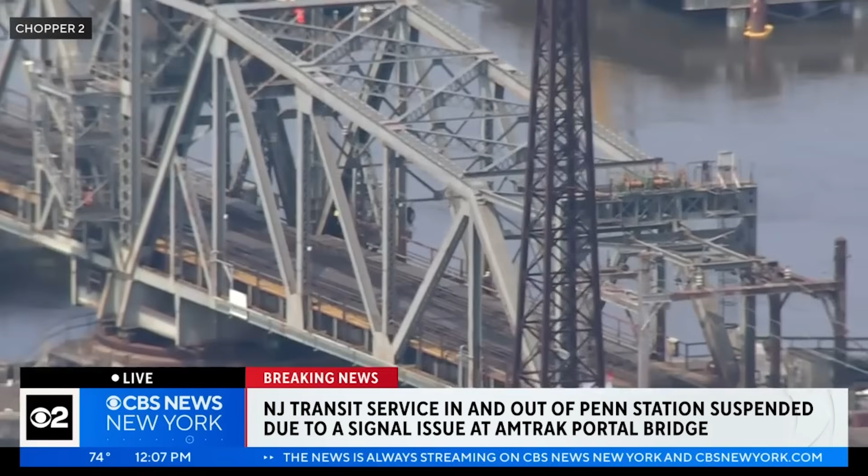The reason? Yes, again, Amtrak's Portal Bridge. Let's face it, this isn't the first time for all the Northeast Corridor riders. Built in 1910, the Portal Bridge was an engineering feat of its time. But today, it's one of the most notorious bottlenecks in the region's rail system. Its low-clearance swing design means it must frequently open for river traffic. And when it does, train schedules are at the mercy of century-old mechanics and human improvisation.

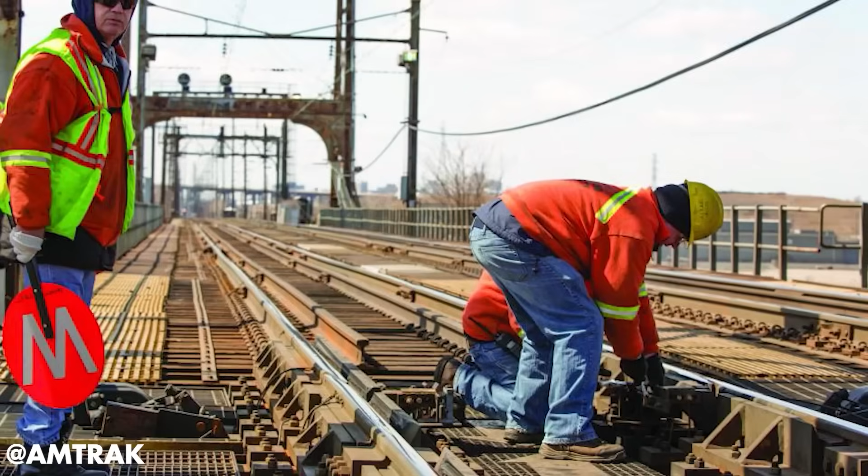That's exactly why the new Portal North Bridge is seen as a monumental leap forward, and it is now in the final stages of completion. Backed by federal and state funding, this $2.2 billion new Portal North Bridge is a landmark investment in U.S. rail infrastructure. But will it fix one of the Northeast Corridor's worst bottlenecks? And how will it reshape the future of train travel? Let's break it down.

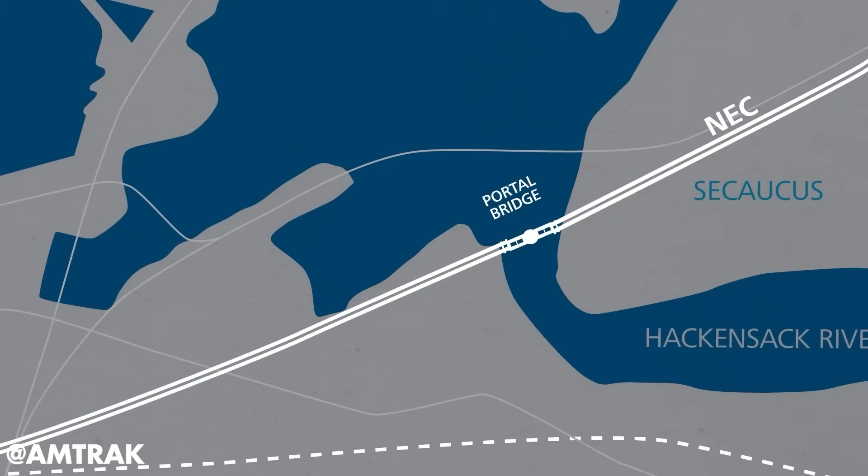The Portal North Bridge project is a critical infrastructure investment to eliminate one of the NEC's most notorious bottlenecks, the 115-year-old Portal Bridge. The existing Portal Bridge, constructed in 1910 by the Pennsylvania Railroad, has long been a point of failure for Amtrak and NJ Transit operations. Designed as a movable swing bridge, it must open for maritime traffic, a process that frequently leads to mechanical failures and service disruptions. Before the pandemic, this bridge carried over 450 daily Amtrak and NJ Transit trains. It served nearly 200,000 passengers per day.

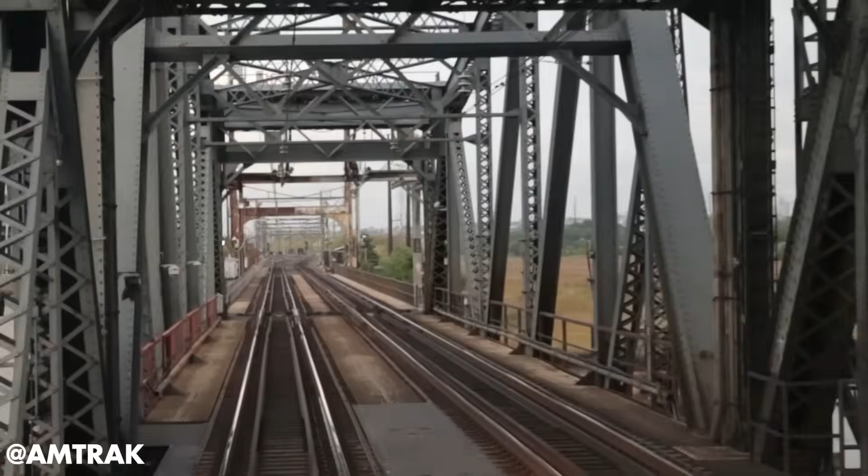Its outdated infrastructure poses a major constraint on one of the nation's most critical transportation corridors, which links Washington, D.C., Philadelphia, New York City, and Boston. To resolve these long-standing issues, the Portal North Bridge is being constructed as a high-level, fixed-span structure rising over 50 feet above the river, eliminating the need for openings. The new bridge spans nearly 2.5 miles, including approach tracks, and features a network-tied arch design, an uncommon but efficient engineering approach in U.S. rail infrastructure. This modern design will allow for higher operating speeds, improved reliability, and increased train capacity, addressing a critical NEC choke point.

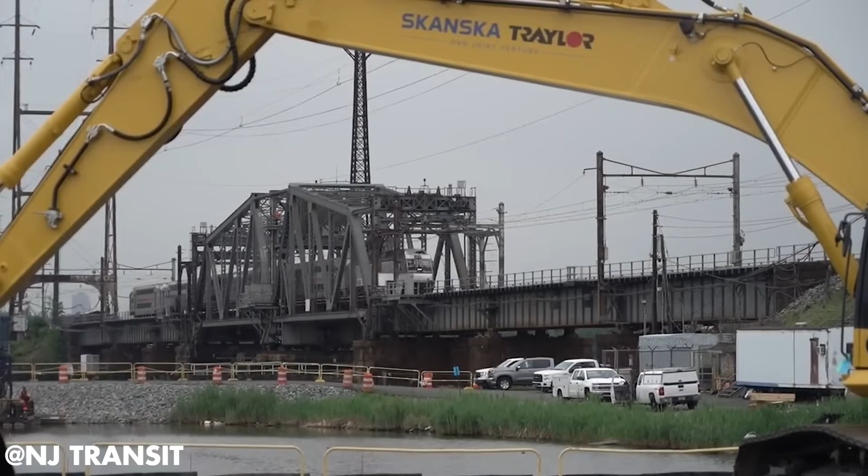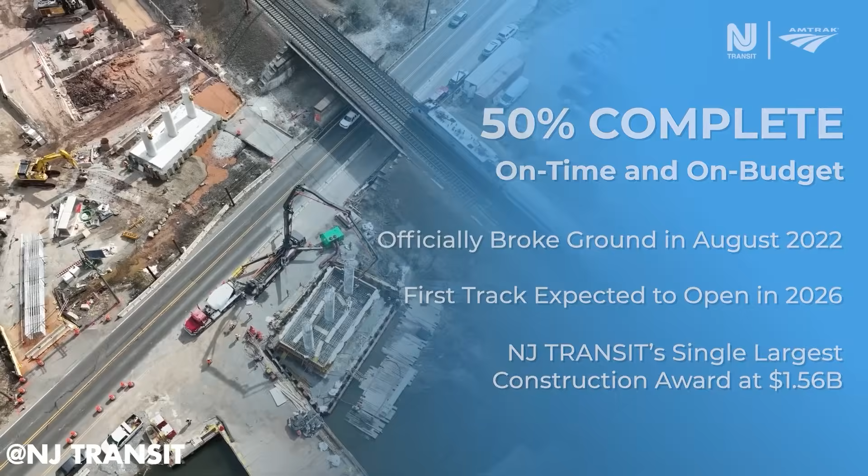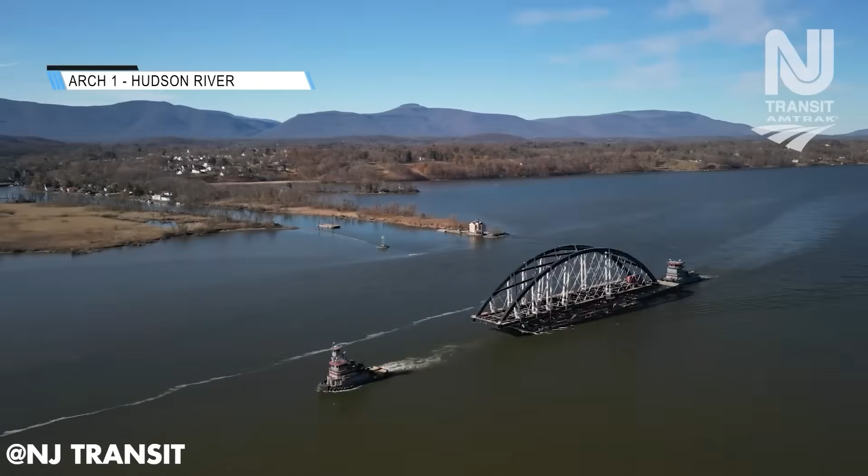The Portal North Bridge project has made significant strides since construction commenced on August 1, 2022, following final approval and the notice to proceed in April 2022. By May 2024, Amtrak and NJ Transit proudly marked the 50% completion milestone. As of fall 2024, the project is at 70% completion, with major structural components now in place. One of the standout achievements was the installation of the first of 3 structural steel arches in November 2024, a highly intricate engineering feat that involved careful barge transport and precision placement. The final arch was successfully installed in February 2025, solidifying the core structure of the bridge.

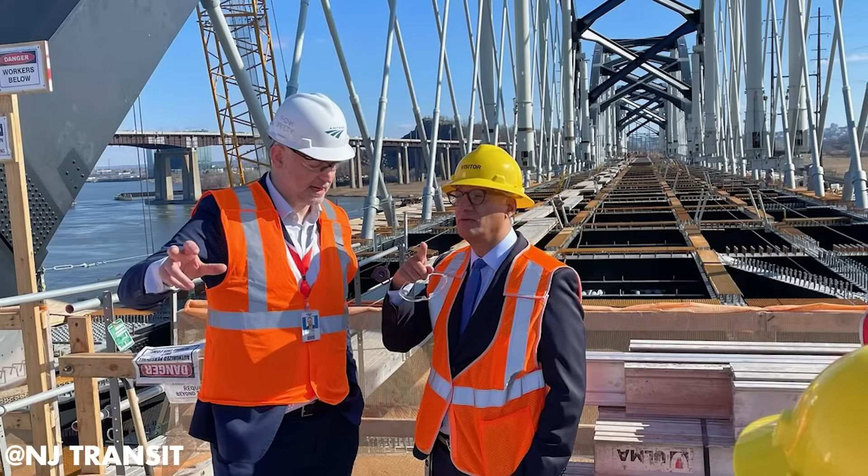As of early 2025, the project is 80% complete, with the first track expected to open in March 2026, enabling limited operations while additional work continues. The second track is set for completion in February 2027, with full integration into the NEC anticipated by late 2027. Once operational, the existing Portal Bridge will be dismantled in July 2028, completing the transition to the new structure. Notably, Amtrak has indicated that the project could be completed on time and within budget, emphasizing efficient project management and strong coordination between federal and state agencies.

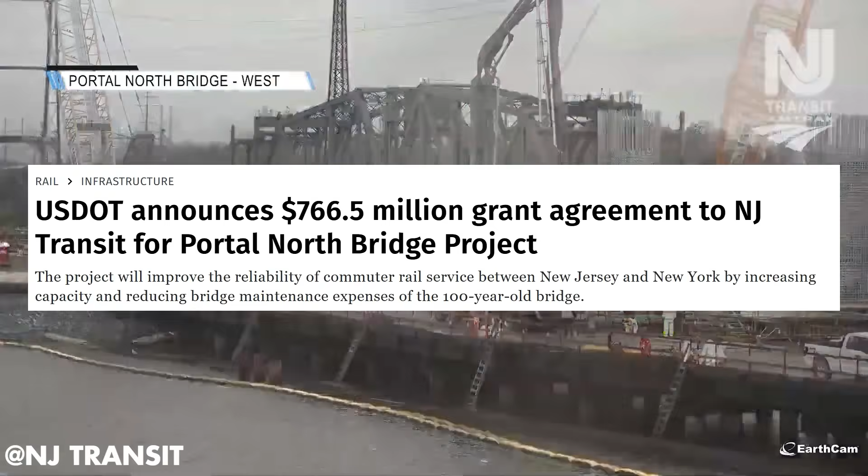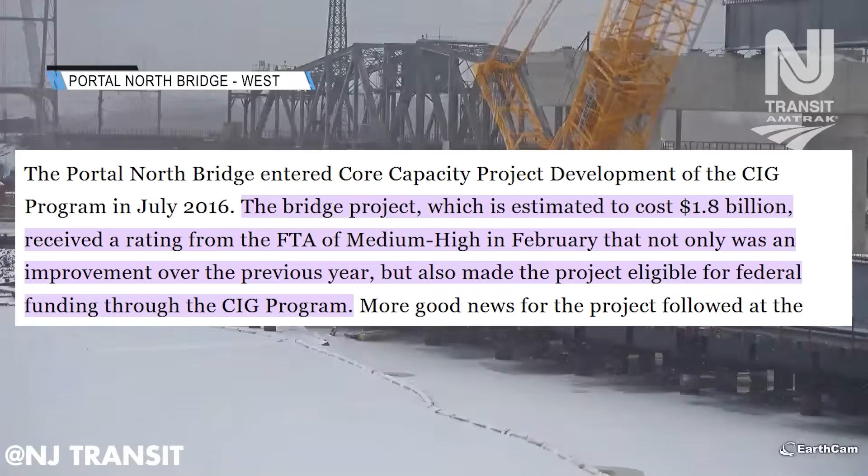The $2.2 billion Portal North Bridge project is a model of collaborative funding, drawing support from federal, state, and regional sources. Securing financial backing was a multi-year effort, reflecting the project's scale and complexity. In January 2021, New Jersey Transit finalized a full funding grant agreement with the Federal Transit Administration, FTA, securing $766.5 million through the Capital Investment Grant Program. This followed a medium-high rating from the FTA in 2020, which positioned the project for significant federal investment.

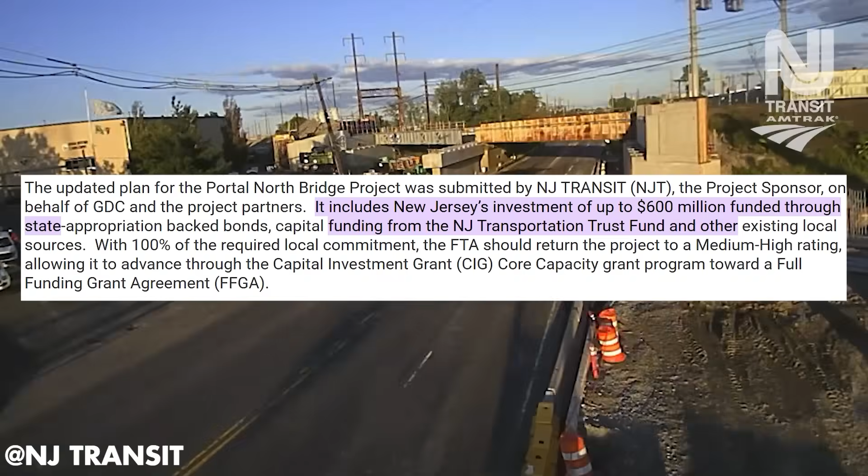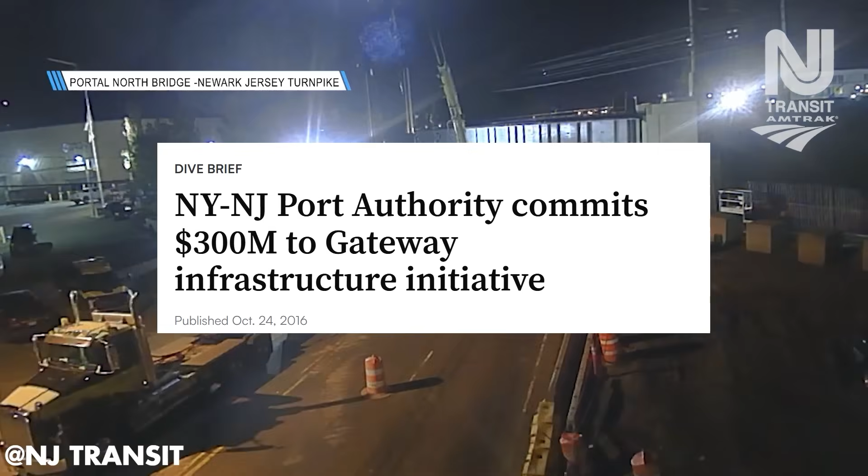New Jersey has committed $811 million, including $600 million from state-backed bonds and additional funding from the New Jersey Transportation Trust Fund. Amtrak has allocated nearly $262 million, while the Federal Highway Administration contributed $57 million. Earlier funding sources include a $55 million Federal Railroad Administration grant in May 2020 and a $16 million grant in 2015 for preparatory work. The Port Authority of New York and New Jersey also pledged $300 million in earlier phases, reinforcing regional commitment to the project.

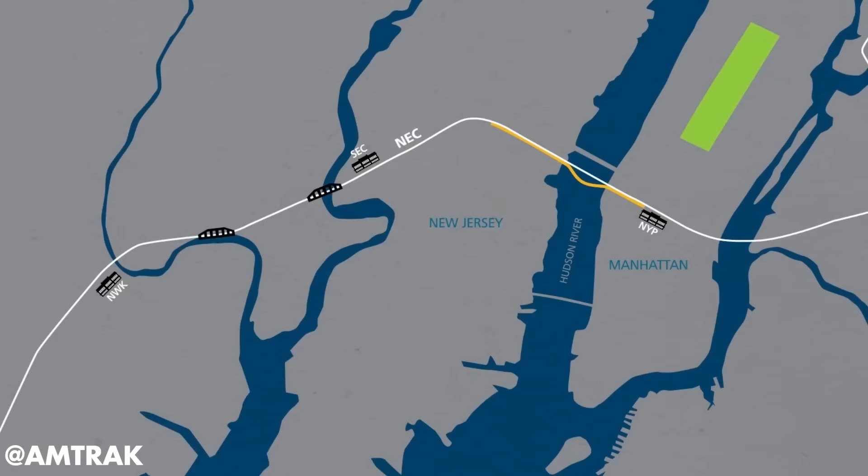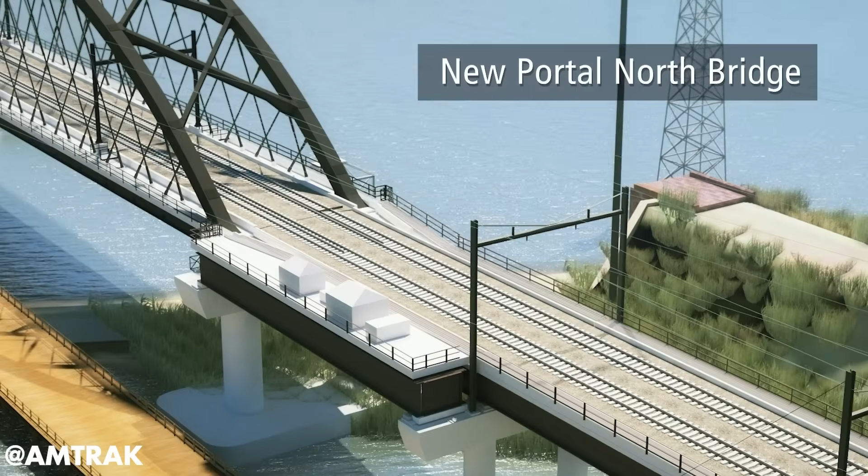While Portal North remains a two-track structure, its design accommodates a future Portal South bridge, which could double its capacity to 4 tracks. This expansion aligns with the Gateway program's long-term vision, enabling NJ Transit and Amtrak to double train service between Newark and New York. Once additional infrastructure improvements, including the Hudson Tunnel project, are completed, the increased capacity will benefit commuters, intercity travelers, and freight operators, strengthening the Northeast Corridor, a corridor responsible for 20% of U.S. GDP. Construction has already generated approximately 15,000 jobs, injecting billions into the regional economy. Once operational, the bridge is expected to boost property values and attract businesses.

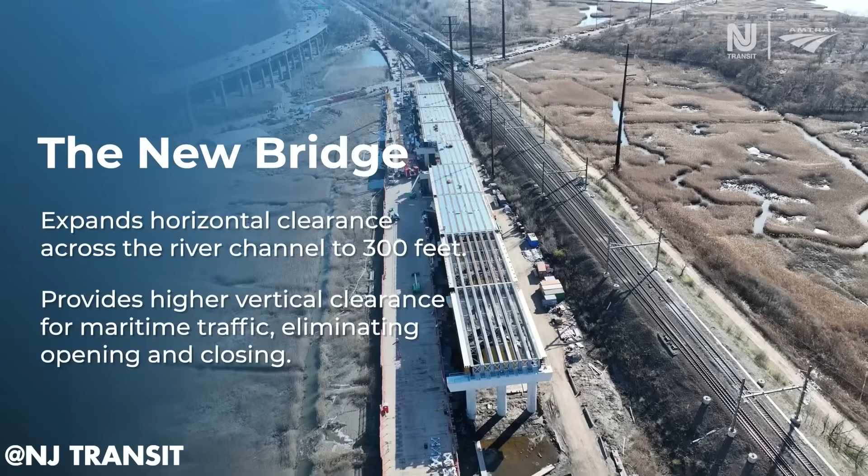Environmental benefits include lower emissions and reduced train idling, contributing to broader sustainability goals. So what were some challenges the project faced?

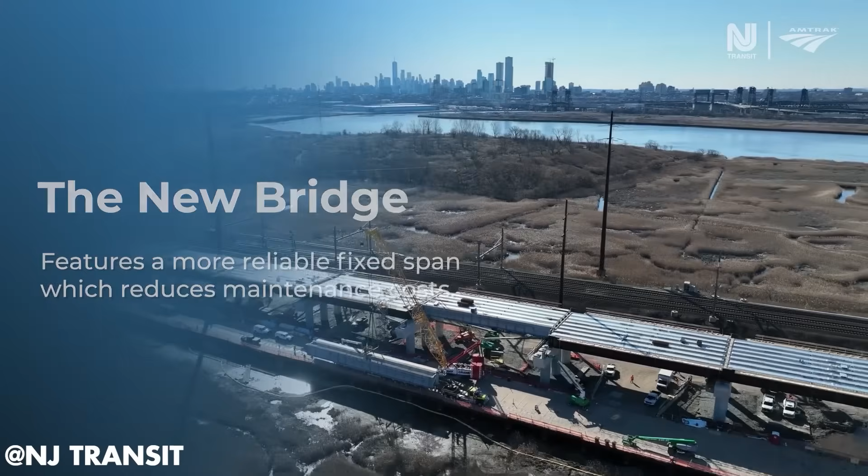Despite its steady progress, the Portal North Bridge project has encountered several challenges, particularly in funding and construction logistics. Initial plans for 2 parallel bridges were reduced to a single structure following the 2010 cancellation of the Access to the Region's Core project, leaving the proposed Portal South Bridge unfunded as of 2025.

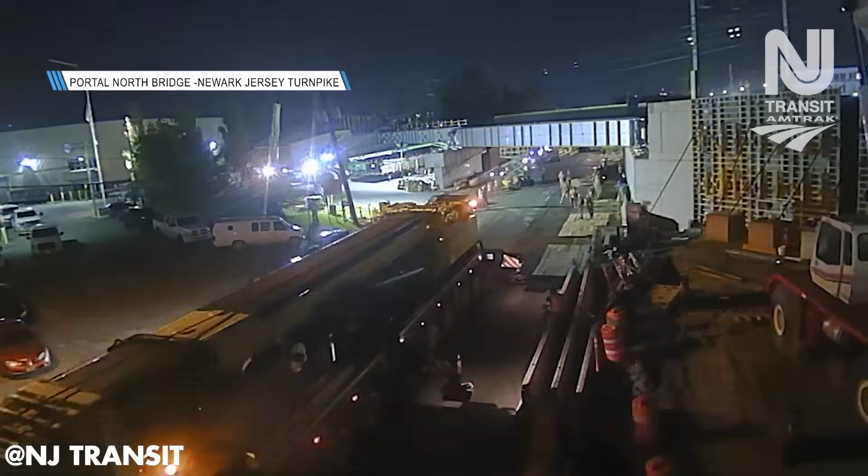Construction logistics present ongoing hurdles. The bridge's location over the Hackensack River and within the densely trafficked Northeast Corridor requires meticulous coordination to avoid service disruptions. The Amtrak Office of Inspector General noted in May 2024 that staffing shortages and information sharing discrepancies with NJ Transit posed risks, though these have since been mitigated.

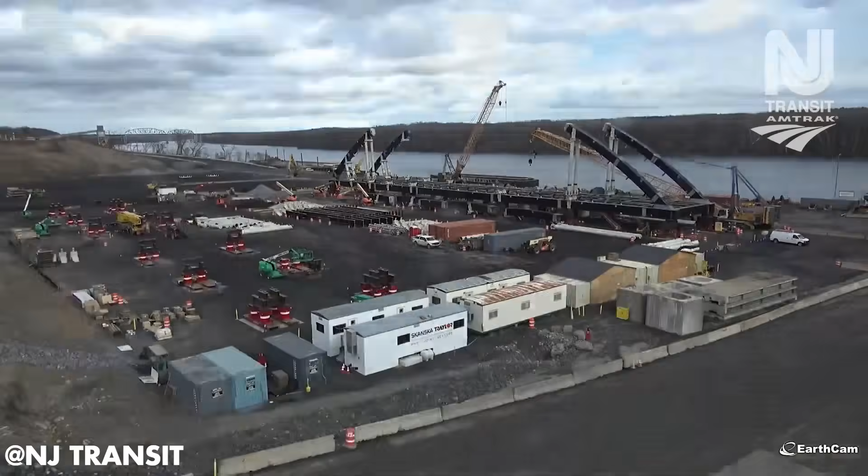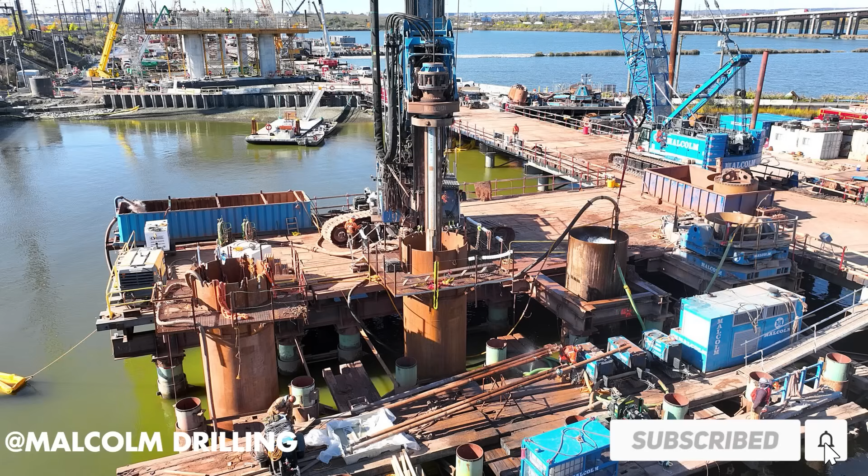The project faces a series of formidable challenges that demand precise coordination and seamless execution. The construction of the Portal North Bridge required deep foundation work to ensure stability. Large steel shafts, measuring 8 to 10 feet wide, were drilled 160 feet into solid rock.

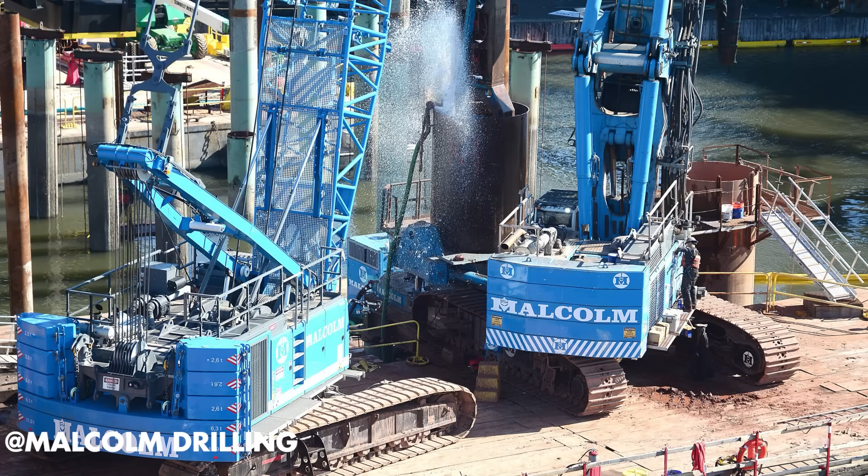The Skanska Traylor Joint Venture, the project's contractor, used specialized equipment, including heavy-duty cranes and drilling machines, to complete this process. To confirm the strength and safety of the foundation, engineers conducted detailed inspections using advanced scanning tools and cameras. Most of this work took place on temporary platforms near live train tracks and high-voltage power lines, making precision and safety a top priority.

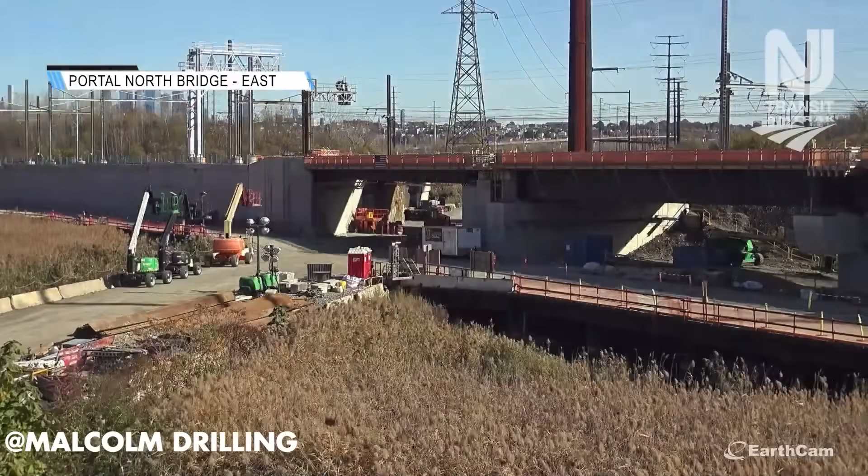Moreover, the route cuts through treacherous marshlands, presenting a unique set of challenges that test the limits of traditional construction methods. With limited access and a delicate ecosystem to preserve, engineers have had to get innovative and resourceful.

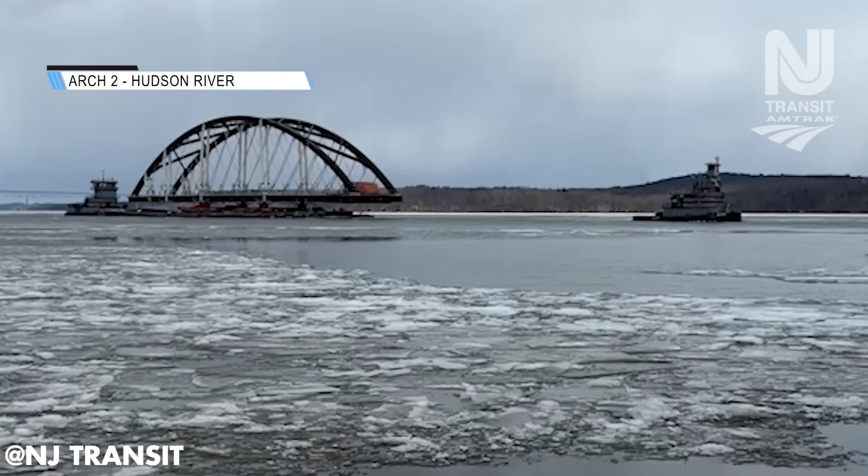To navigate these obstacles, the project has seen the completion of 4 work trestles, spanning an impressive 3,400 feet, an engineering feat in itself. 2 of these trestles remain in place, serving dual purposes. One will be transformed into a permanent fishing pier, adding a community benefit, while the other will provide maintenance access and lay the foundation for a future bike trail.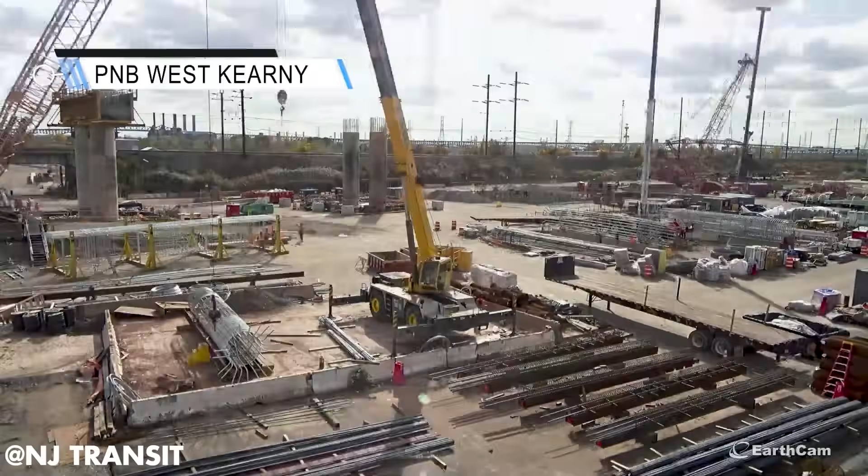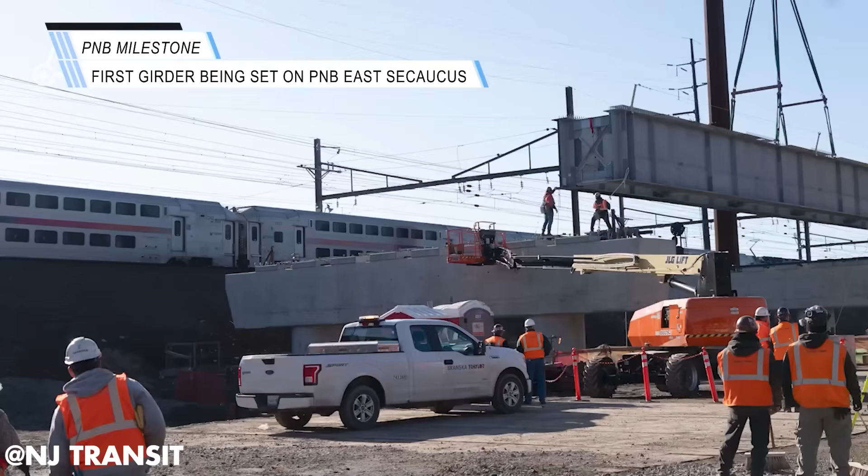Add to that the complexity of managing catenary structures, critical to maintaining rail power, and the need to operate within an active rail corridor, and the scale of the task becomes clear. To rise to these challenges, the project has leveraged cutting-edge technologies. From automated crane swing limiters that guarantee safety during heavy lifting, to engineered fill that strengthens the foundation, these advanced tools allow the team to push forward with minimal disruption to rail operations while maintaining the highest standards of safety and efficiency.

This complex and environmentally sensitive route demands not just advanced construction techniques, but also careful coordination and planning, making it one of the project's most formidable hurdles.

Political and bureaucratic challenges significantly influence the Portal North Bridge project's progress. While President Biden championed infrastructure investments, stating that the new bridge would eliminate long-standing delays and improve reliability, funding uncertainties in previous administrations created setbacks.

Under President Trump, federal spending cuts and project freezes raised concerns among transportation officials as large rail projects rely heavily on long-term federal commitments. The administration's reluctance to fund NEC improvements stalled progress until Governor Murphy secured critical federal support in 2020. Looking ahead, one of the biggest challenges will be managing Amtrak's workforce capacity. With multiple major projects underway, ensuring that Portal North remains on schedule without workforce shortages will require careful coordination.

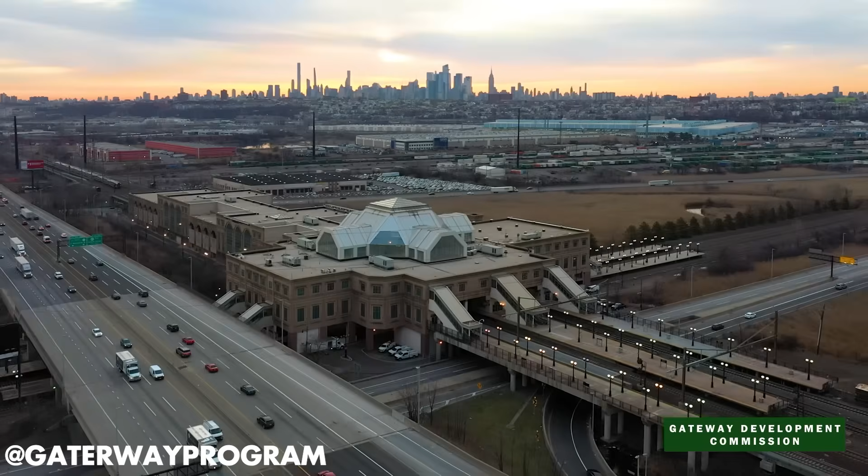What about the Gateway project? The $16 billion Gateway program, now under construction, includes plans for new tunnels that will ultimately connect to the Portal North Bridge. Several related projects remain in the design and engineering phases, with progress dependent on securing additional federal funding to supplement contributions from New York, New Jersey, and Amtrak.

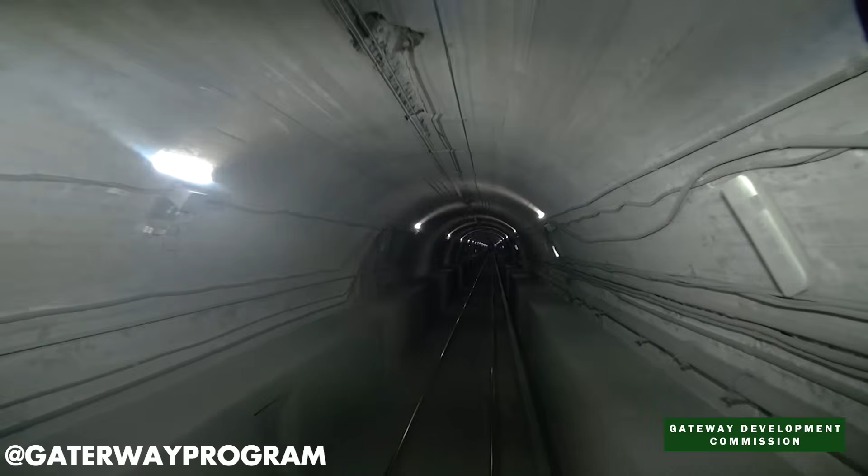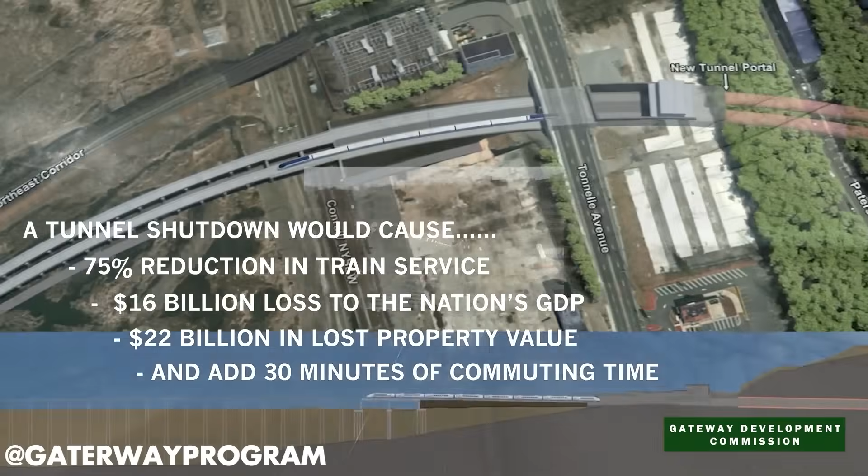While the Trump administration faced criticism for delaying the Gateway Tunnel project due to political conflicts with then Senate Minority Leader Chuck Schumer, it did approve the Portal North Bridge in 2020. The CEO and president of NJ Transit emphasized the project's bipartisan support, noting that Trump initially backed it. He also suggested that once the bridge is complete, the president should take credit for its success, acknowledging his role in advancing the project.

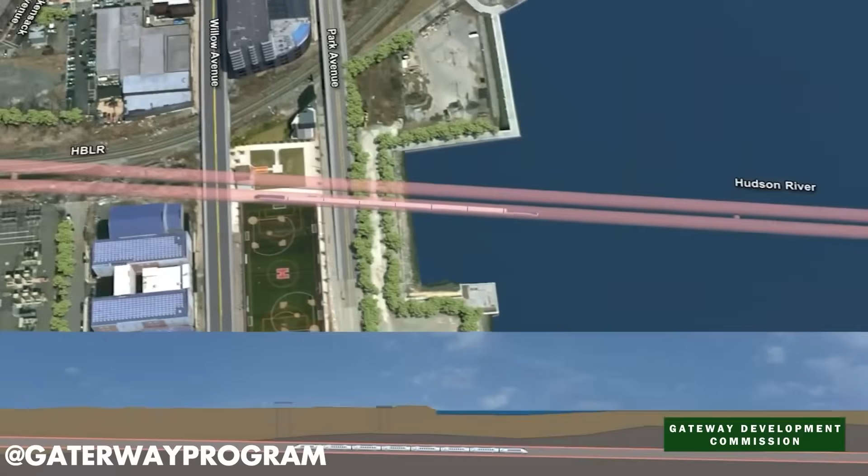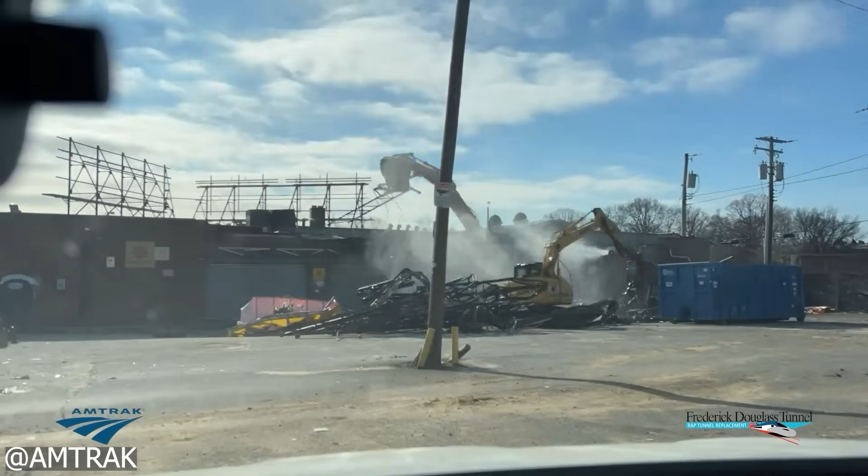Amtrak's $6 billion Frederick Douglass Tunnel program is finally underway. For years, the crumbling old tunnel in Baltimore has slowed trains to a crawl, creating one of the worst bottlenecks on the NEC. Now, a replacement plan promises faster trains, increased reliability, and modernized infrastructure. Backed by stakeholders, this project marks a major investment in American rail.

But can it truly fix the aging infrastructure choking this corridor? And what will it mean for riders, communities, and the region's economy? Let's break it down.

Opened in 1873, when Ulysses S. Grant was president, the Baltimore and Potomac Tunnel is the oldest tunnel in Amtrak's network and a critical link on the Northeast Corridor, connecting Baltimore's Penn Station to Washington, D.C. and beyond. Every day, nearly 750,000 Amtrak and commuter customers travel on the NEC, and around 6 million Amtrak passengers per year rely on travel through this tunnel alone.

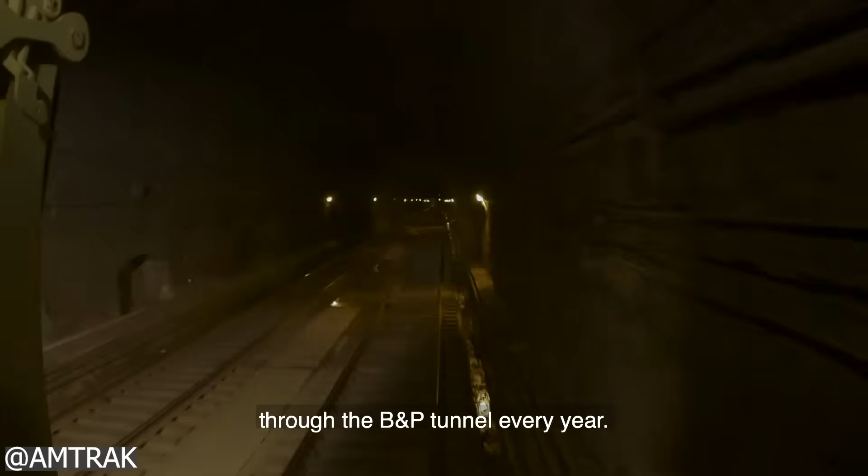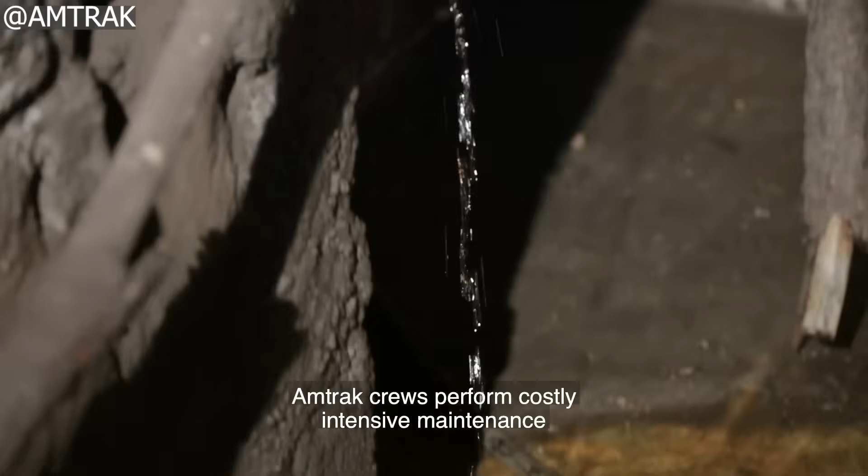Originally designed for 19th century trains, the 1.4-mile tunnel now presents major challenges for the 14 million Amtrak and MARC riders who depend on it annually. Its aging structure suffers from water infiltration, a sinking floor, and outdated design features like tight curves and low clearances, which force trains to slow down to just 30 miles per hour. A particularly sharp curve inside the tunnel is a key contributor to this slowdown.

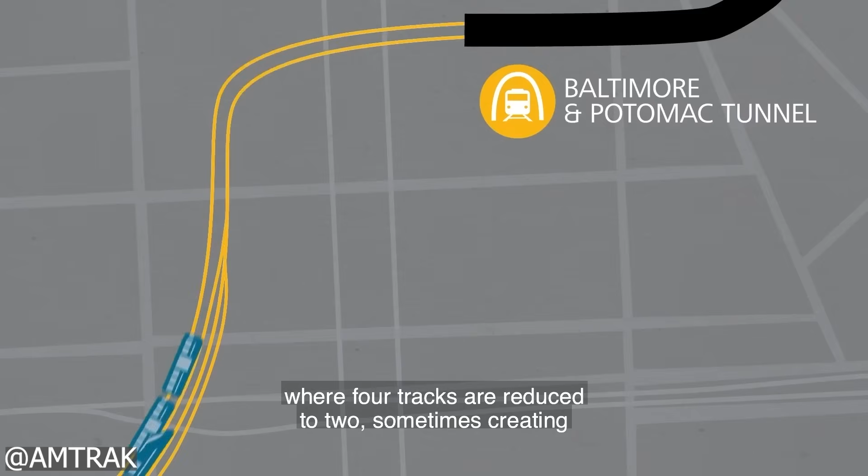These physical constraints create one of the worst bottlenecks in the entire NEC. In fact, 4 tracks are reduced to just 2 inside the B&P tunnel, limiting capacity and causing frequent delays. This chronic congestion impacts over 10% of weekday trains and occurs on nearly 99% of weekdays. Moreover, the tunnel's outdated design prevents the installation of modern fire and life safety systems.

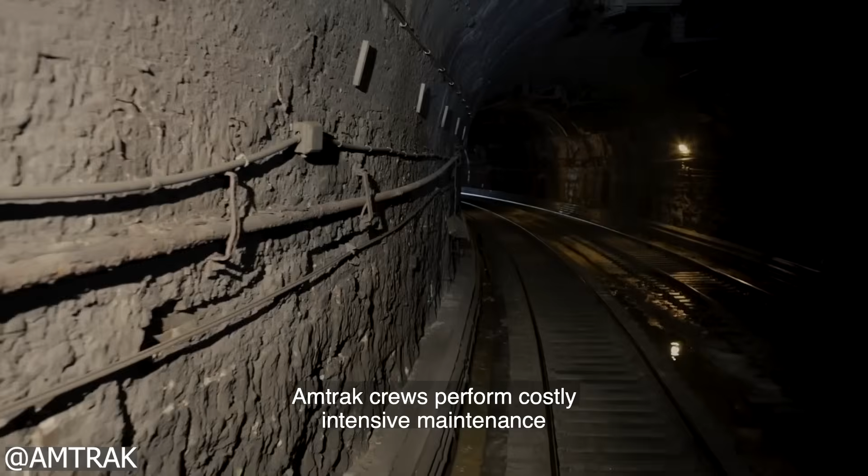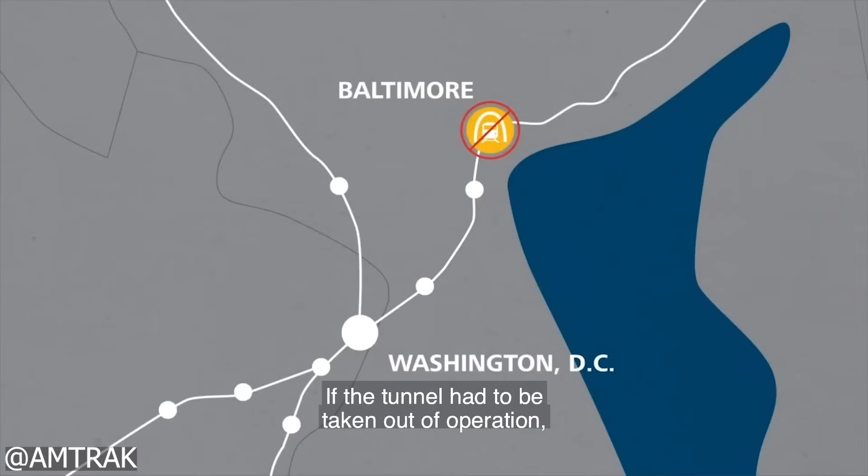Because the B&P tunnel is a single tube, any maintenance work on one track requires shutting down both tracks, effectively halting all train movement through the tunnel, affecting more than 19,000 daily commuters and disrupting national rail connectivity. Amtrak crews currently conduct intensive, costly maintenance to manage issues like deteriorating masonry and water infiltration. Rail teams inspect the tunnel multiple times each week just to keep it safely operational. Yet, these stopgap efforts can only go so far.

According to the Federal Railroad Administration, FRA, the B&P tunnel is one of the most serious infrastructure vulnerabilities on the Northeast Corridor. Amtrak's Frederick Douglass Tunnel program will resolve these challenges. The program, named in honor of a Maryland native, abolitionist, and frequent railroad passenger, seeks to modernize the corridor, enhance connectivity, and bring lasting benefits to the Baltimore region, representing Amtrak's largest single project to date, in partnership with the state of Maryland.

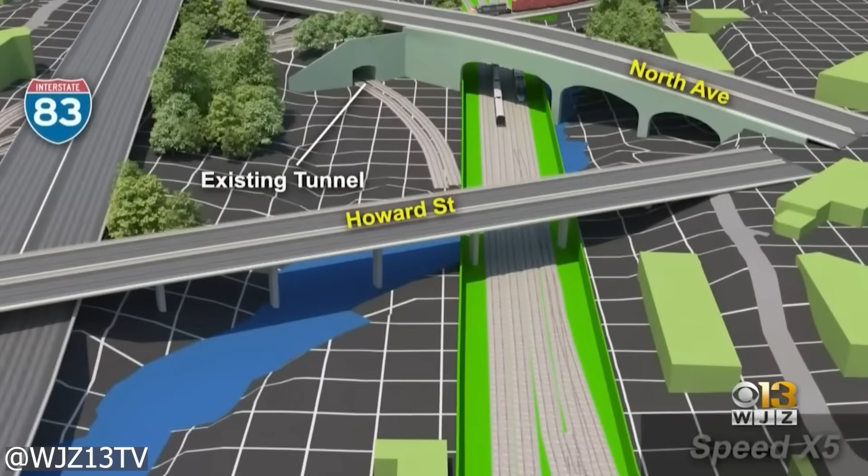With a total investment of approximately $6 billion, the new system includes a brand new tunnel with 4 tracks and full electrification, eliminating the need for diesel-powered locomotives and greatly reducing emissions. Amtrak and Maryland are also working to fully electrify the Penn line, which will allow for even faster, cleaner service throughout the corridor. The program delivers a wide array of benefits that extend far beyond immediate infrastructure upgrades, reaching communities, regional economies, and environmental goals across the Northeast Corridor.

On the performance side, this new tunnel will dramatically cut travel time between downtown Baltimore and Washington, D.C., reducing MARC train trips to as little as 22 minutes, down from current averages of 40+. The program is expected to eliminate nearly 7 hours of train delays on an average weekday and save rail customers around 450,000 hours annually. This improved reliability and speed is projected to spark significant ridership growth, drawing more travelers back to rail with a smoother, faster experience.

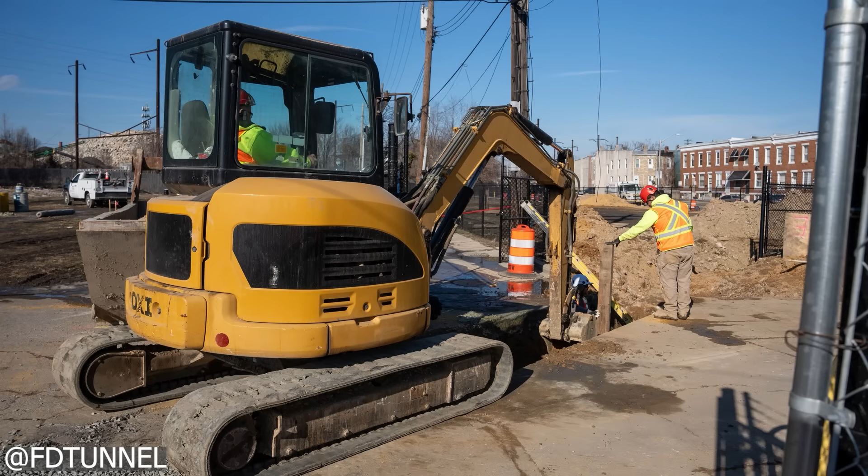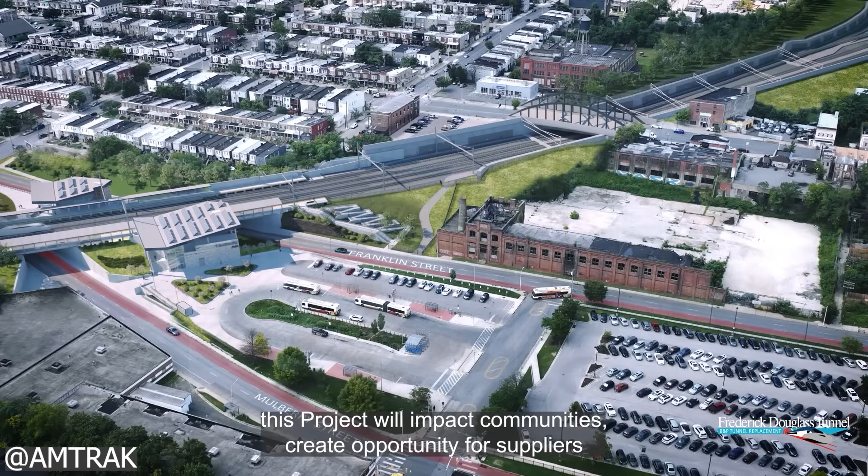For the economic benefits, the construction phase alone is expected to generate 30,000 jobs, including roughly 20,000 direct construction jobs, most of which do not require a college degree, creating a major pathway for skilled trades and union labor. But the opportunity doesn't stop at construction. The project will also open the door to new contracts for local businesses and suppliers, especially minority and women-owned firms, creating a ripple effect of economic growth throughout Baltimore and the greater region.

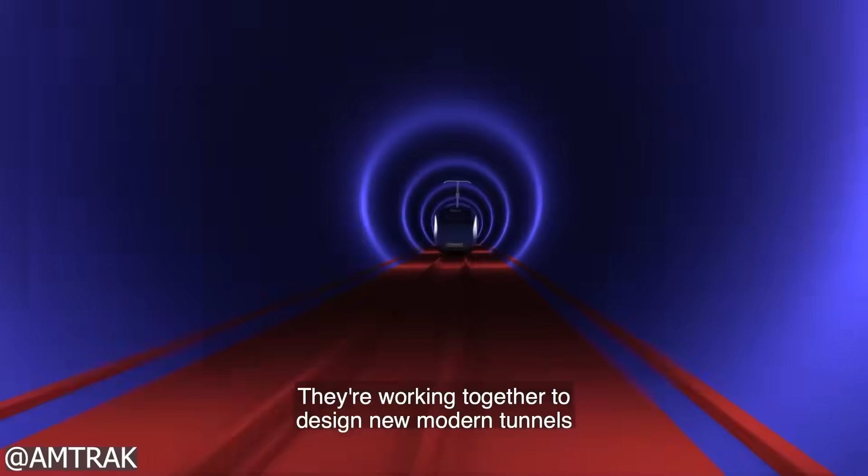Environmentally, this is a major step forward. The move to electrified high-speed rail will provide a low-emissions alternative to cars and short-haul flights, aligning with national climate goals and helping to reduce the carbon footprint of regional transportation. Locally, Amtrak's $50 million community investment program reflects a broader commitment to equity and inclusion. Funds are being directed into workforce training, youth programs, parks and recreation, and neighborhood revitalization in historically underserved communities such as Reservoir Hill and Sandtown-Winchester.

Amtrak has also responded to community feedback and concerns, especially after a civil rights complaint in 2023, by improving transparency, expanding public engagement, and updating its community benefits agreement. Since March 2024, the agency has hosted bi-monthly public meetings to hear directly from residents and ensure the project reflects community needs and priorities. Ultimately, the Frederick Douglass Tunnel program isn't just about faster trains. It's about creating a more accessible, connected, and sustainable future for Baltimore and the entire Northeast Corridor.

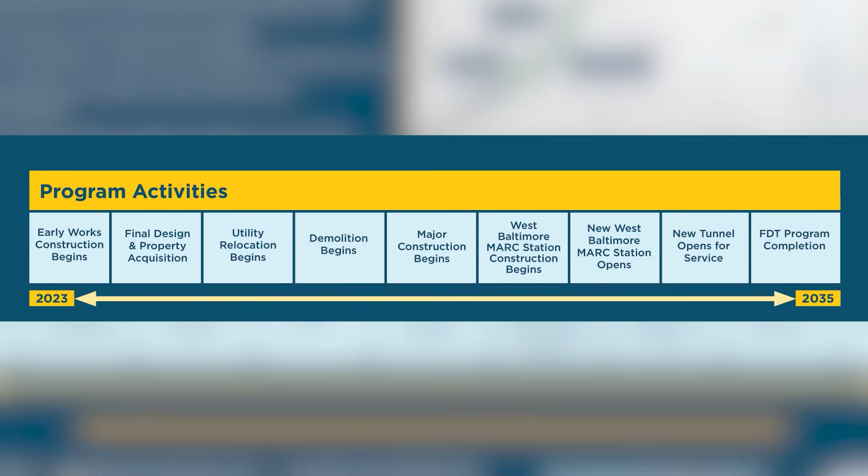The Frederick Douglass Tunnel program is being rolled out in a phased, multi-year construction plan running from 2023 through 2035. This long-term approach allows Amtrak and its partners to coordinate a massive infrastructure upgrade while minimizing disruptions on the Northeast Corridor, one of the busiest rail corridors in the country. The program began in 2023 with early construction work focused on clearing the path, literally and figuratively, for what's to come. This included site preparations, utility relocation, and upgrades to existing access routes. At the same time, Amtrak launched its final design phase, converting decades of planning and engineering studies into detailed, construction-ready plans.

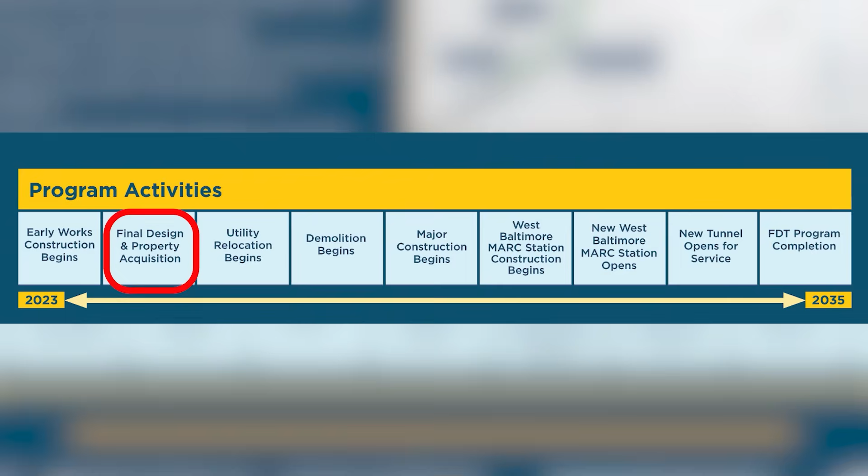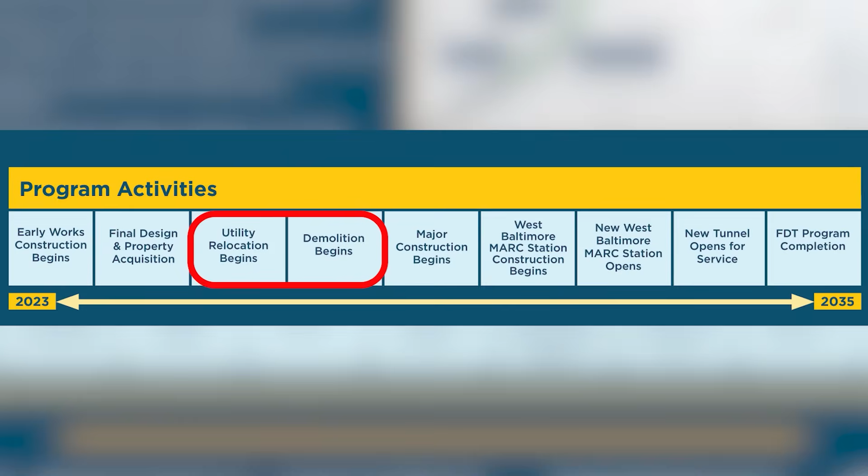Critical to this phase was also property acquisition, as Amtrak secured necessary land and underground rights to make space for the new tunnel, bridges, and stations. Once the groundwork was in place, crews moved into utility relocation and demolition. These steps cleared the path for full-scale construction to begin.

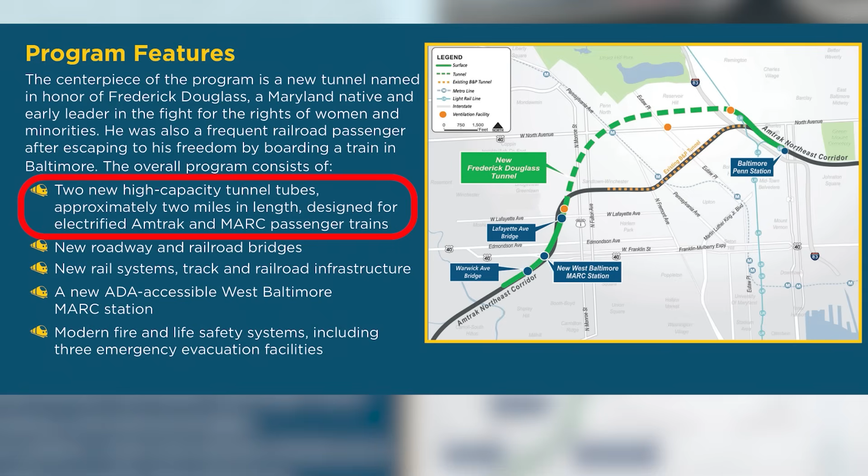With the site prepared, major construction is now underway. This centerpiece phase includes building 2 brand new tunnel tubes, each approximately 2 miles long, specifically designed for high-speed electrified Amtrak and MARC passenger trains. Alongside tunnel construction, the program involves the replacement of aging roadway and railroad bridges, as well as the installation of new rail systems, modern tracks, and supporting infrastructure.

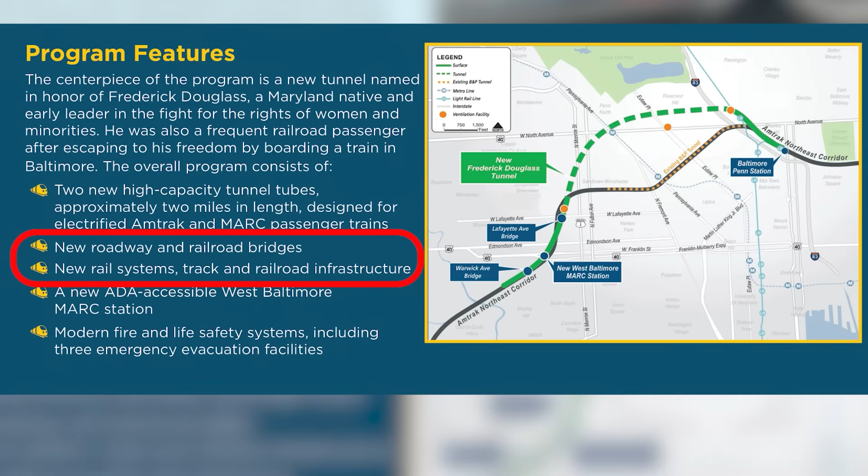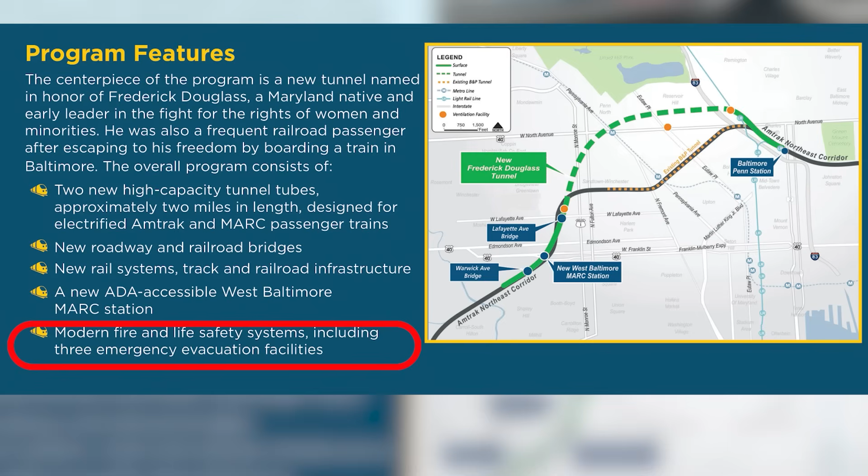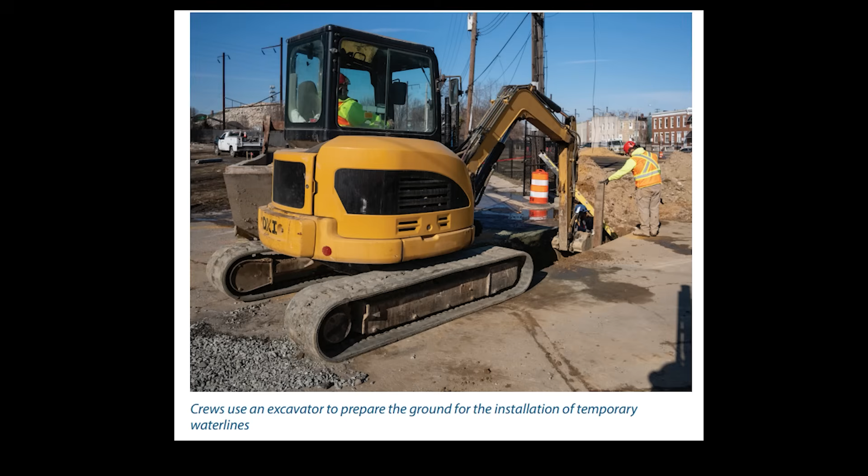A key improvement is the implementation of modern fire and life safety systems, addressing critical deficiencies in the existing tunnel, which lacks such protections, thereby boosting safety and reliability for millions of passengers. Amtrak anticipates phased system integration and tunnel boring to begin in 2025, with full completion targeted for 2035.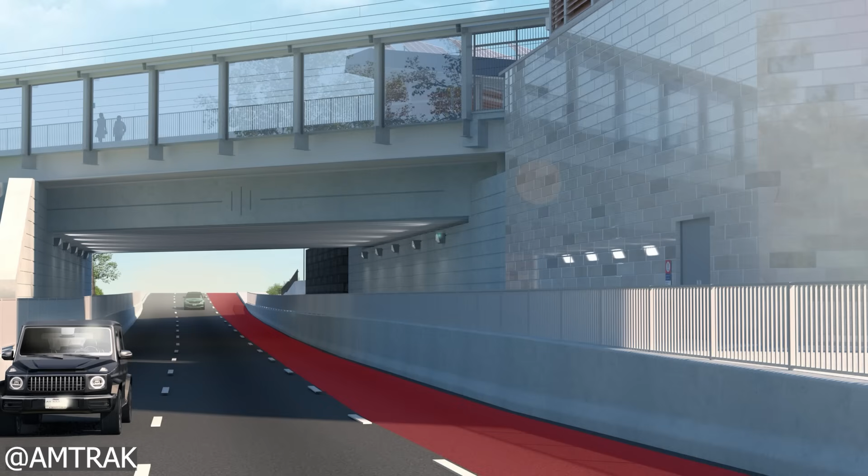Another key milestone within the program is the complete rebuild of the West Baltimore MARC station. This new station will offer a better passenger experience while ensuring accessibility for all riders, a significant win for equity and inclusion. By the early 2030s, work will begin to wind down as crews shift their focus toward final integration, testing, and commissioning of the new systems.

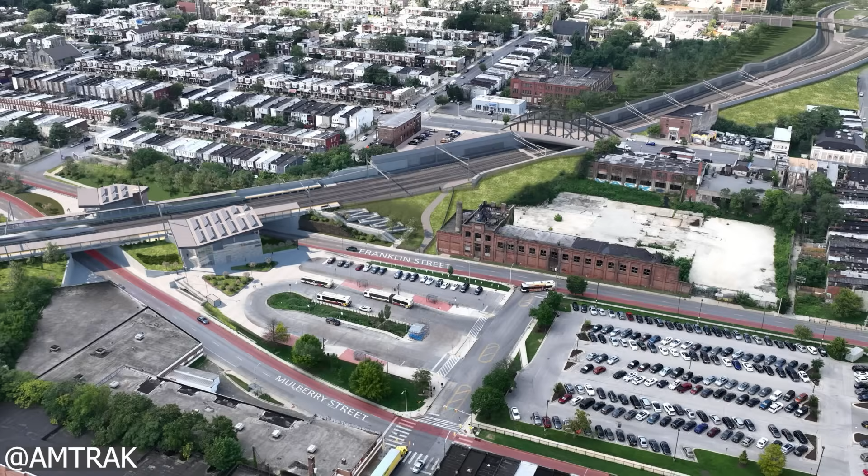The new West Baltimore MARC station will open to the public first, followed by the long-anticipated debut of the Frederick Douglass Tunnel itself. Once complete, riders will benefit from a safer, more efficient, and electrified rail experience, one that is faster, cleaner, and built for the 21st century.

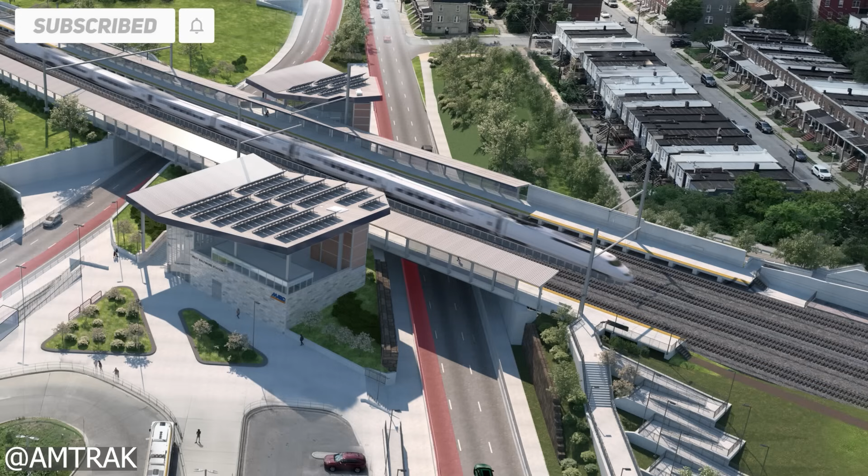The tunnel program is estimated to cost $6 billion, with funding secured through multiple sources: up to $4.7 billion from Infrastructure Investment and Jobs Act FRA discretionary grants, awarded in fiscal year 22 to 23, and contributions of $1.2 billion from Amtrak and the Maryland Department of Transportation, ensuring a collaborative funding model.

In a notable shift toward modern project delivery, Amtrak introduced its first-ever delivery partner model in April 2024. The selected team was chosen to share in project risk and provide oversight across design, construction, and contract administration.

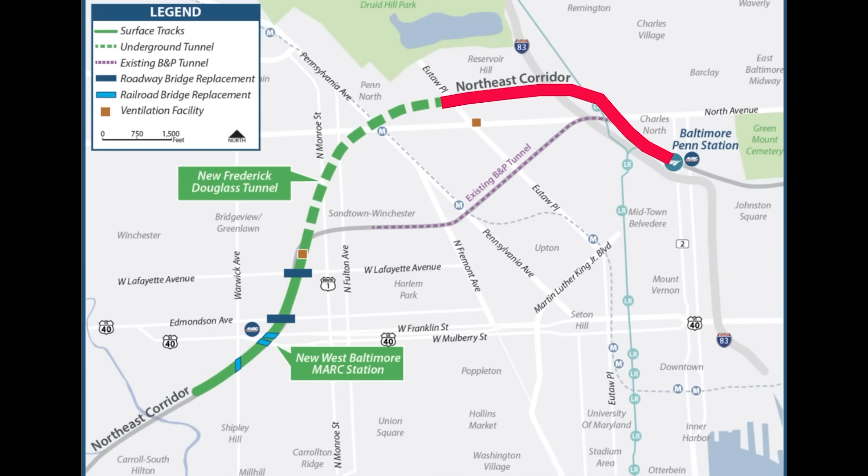This program faces substantial challenges, from early-stage planning and governance shortfalls to ongoing community concerns and the inherent complexity of large-scale infrastructure delivery. A comprehensive review by the Amtrak Office of Inspector General, OIG, in October 2024 showed deficiencies in Amtrak's project readiness. The report highlighted that Amtrak had not completed essential planning activities, including risk management, scheduling, and documentation protocols, even as major construction activities were imminent. These planning gaps could elevate the risk of delays and cost overruns.

Organizational capacity has been a key constraint. When the Capital Delivery Department assumed control of the program in 2022, staffing consisted of a single program manager. By late 2023, the team expanded to 7, including an assistant vice president, yet 5 members reported being overwhelmed. Furthermore, the onboarding of the selected delivery partner was delayed by over a year, postponing the establishment of a robust management framework intended to oversee contract integration, design coordination, and risk mitigation.

Funding coordination adds another layer of complexity. Administering this multi-source funding stream across federal, state, and local stakeholders requires continuous interagency coordination and fiscal accountability, particularly given the evolving project scope and inflationary pressures in the construction sector.

Equally critical are the concerns voiced by communities directly impacted by the project. A civil rights complaint was filed with the U.S. Department of Transportation by residents of West Baltimore, including the Reservoir Hill neighborhood. The complaint challenges Amtrak's plan to acquire over 10 acres of surface and subterranean property rights for tunnel construction, raising fears about property devaluation and long-term impacts on predominantly Black and low-income communities.

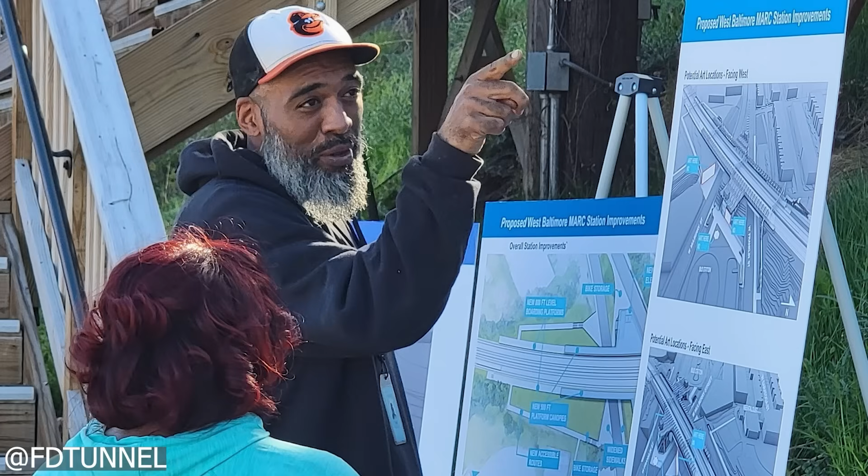Amtrak has responded with a series of bi-monthly public engagement sessions as part of its community investment program. These meetings aim to improve transparency and solicit local input, yet many residents continue to express skepticism regarding the project's equity implications. The challenge ahead lies in balancing regional infrastructure goals with local community interests, particularly in historically underserved neighborhoods such as Sandtown-Winchester and Reservoir Hill.

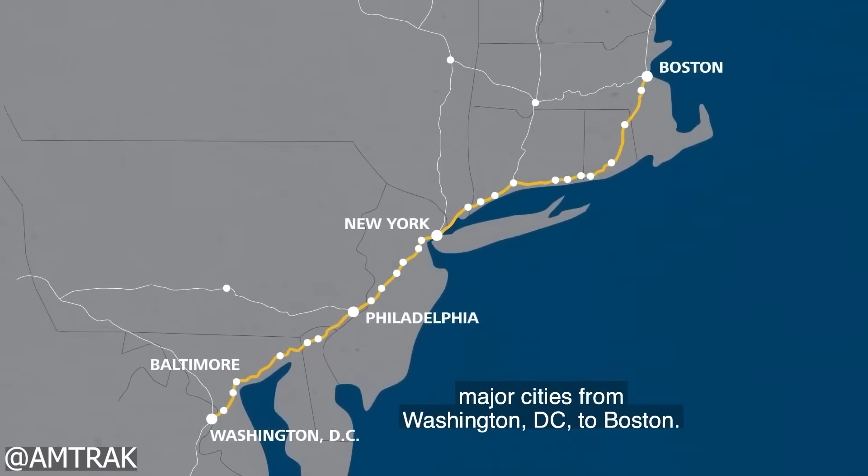From an engineering and construction standpoint, the program's scope is technically complex. It entails complex upgrades, so these efforts must be carefully sequenced and delivered within the constraints of active rail operations on a corridor that hosts more than 2,200 trains per day. Any misalignment between planning, execution, and interagency cooperation could trigger delays.

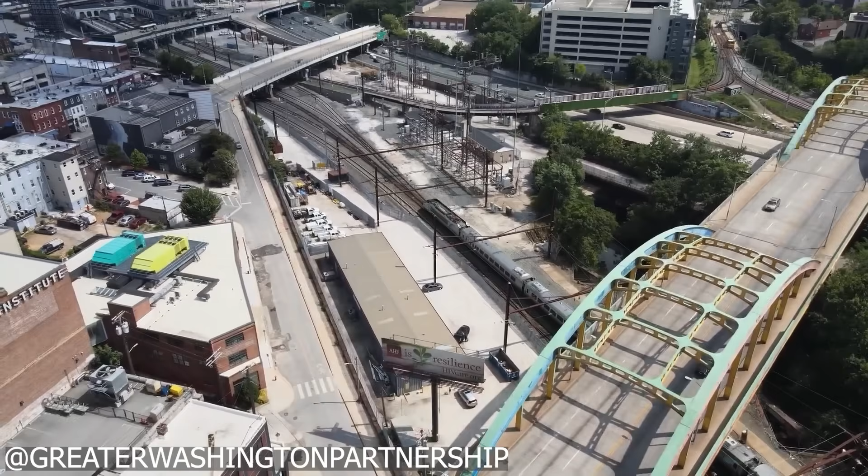Given the scale of investment and the ambitious benefits, is the Frederick Douglass Tunnel program truly worth it? The potential is clear, but the challenges remain significant, from early planning shortfalls to community concerns and complex project delivery. So the real question is this: can the project ultimately deliver on its promise of transforming rail travel in the Northeast Corridor? Or is it still too early to say with confidence?